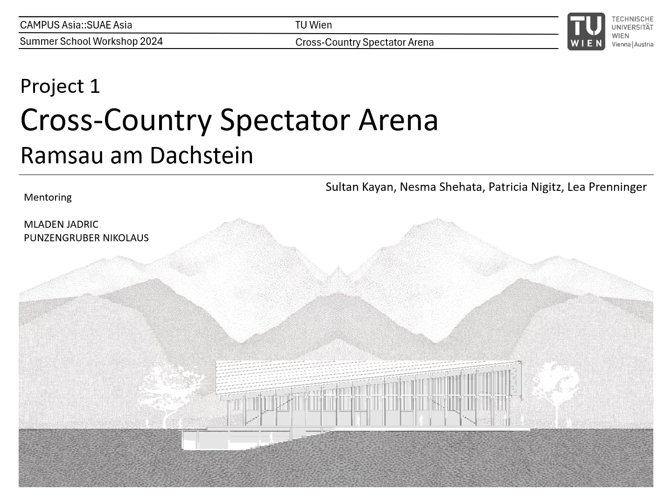The arena is located in the center of Ramsau, right next to the local swimming pool and the ski jumping facility. Our arena concept is based on the structure and principles of the Palazzo della Ragione in Padua. This medieval palace of justice building was established in the 13th century and once served not only as a town hall but also as a market hall. It was and still is a multi-purpose building.

This idea is translated into a multifunctional arena, serving as a cross-country arena in winter and event location in summer, a place where people get to meet, work and communicate. Similar to the Palazzo della Ragione, our arena building is surrounded by an arcade. It serves as a buffer zone, creating a transitional area between the weather-exposed outside and the dry and warm inside.

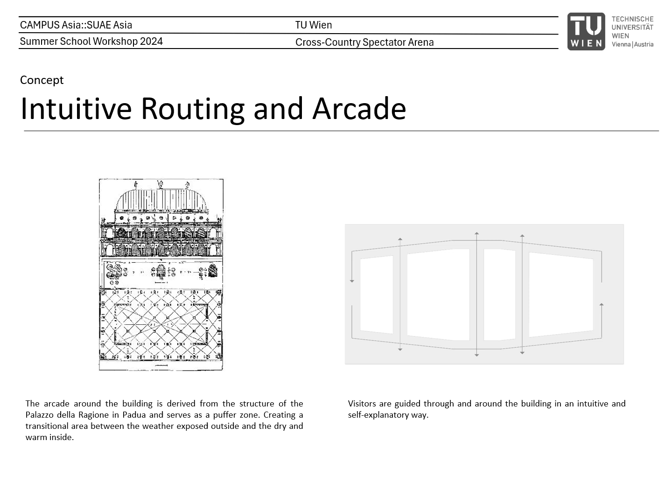Visitors are guided through and around the building in an intuitive and self-explanatory way. By moving through the building, the sense of intimacy increases from the exterior to the interior of the arena building. On the outside, the building presents a more formal and neutral facade.

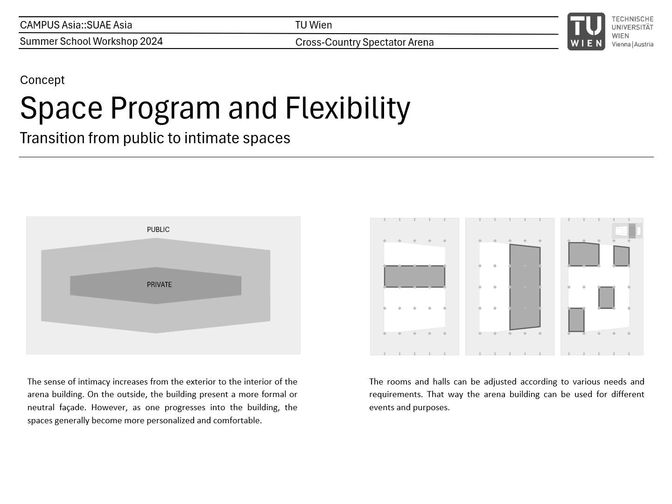However, as one progresses into the building, the spaces generally become more personalized and more comfortable. Our building is based on a grid which defines our construction. However, the rooms can be divided and used in a flexible manner. That way, it is made sure that the local community can still shape the arena according to their own needs.

The grid starts in the parking deck and reaches up to the second floor. The ground floor shows the surrounding arcade and the special two-story multipurpose hall in the northern end of the building. This hall can be used for various events. The first floor consists of all the necessary organizational rooms.

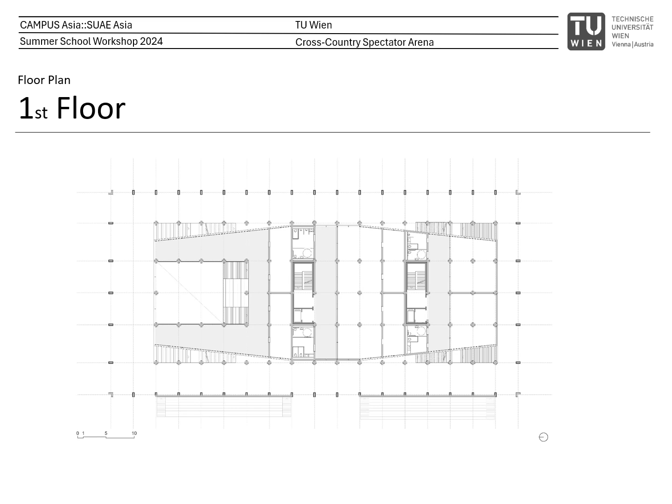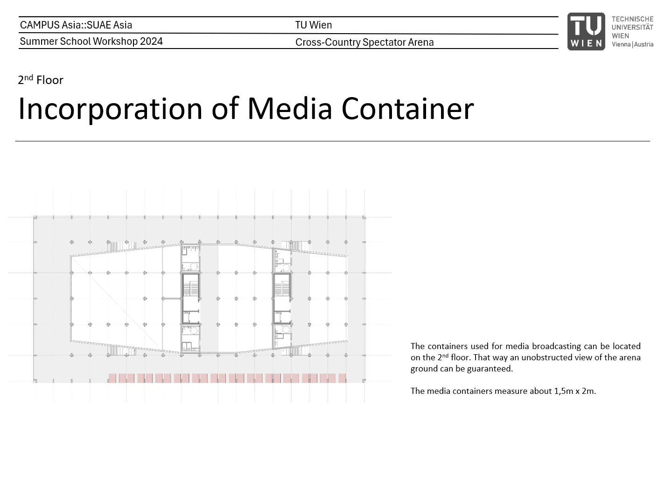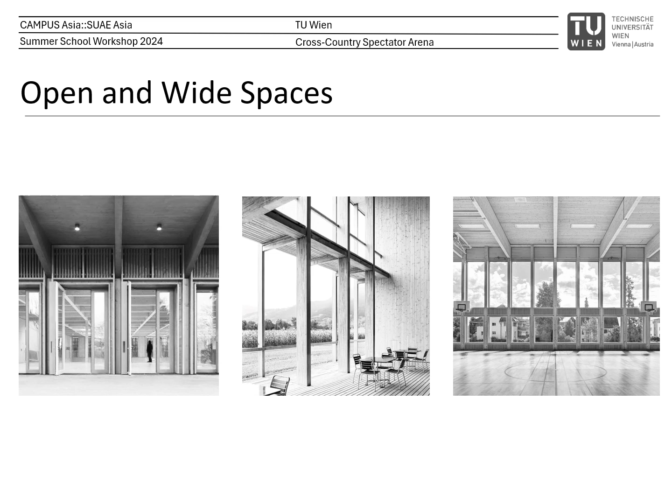The building connects with the community of Ramsau am Dachstein, not only in the way it is used, but also in the way it is shaped. Its visual appearance is inspired by the local vernacular architecture. The arena rests on a solid concrete pedestal, elevating the ground floor from the street level.

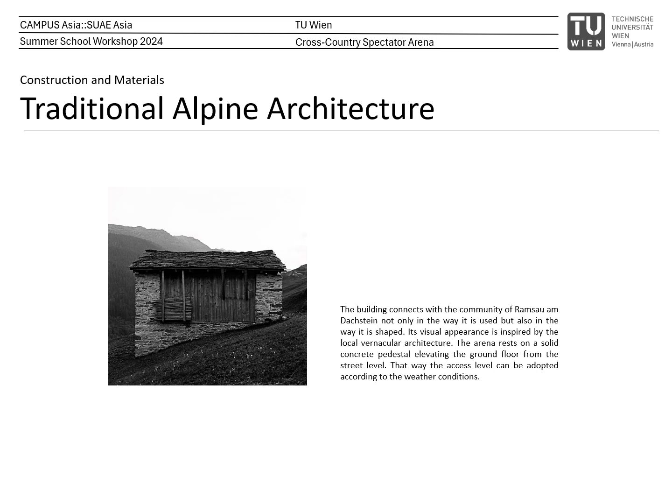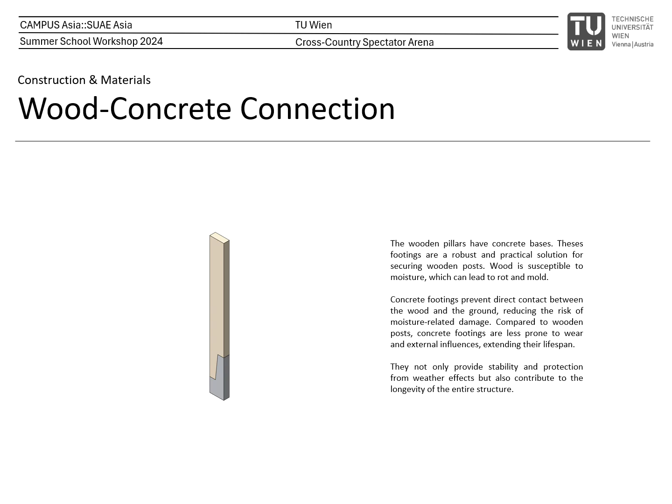Furthermore, the wooden pillars are supported by concrete bases. The wood connections are easy to construct and reconstruct.

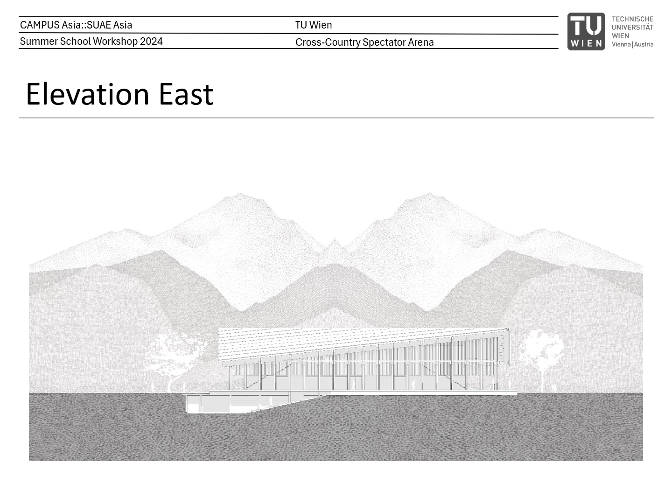The facade is minimalist and reduced in ornamentation. That way, it doesn't interrupt the surrounding environment. More so, it fits into the mountain shapes and neighboring gable roofs, without trying aggressively, almost in a reserved way. Construction becomes ornamentation, and the scale of the beams and posts is chosen precisely and adjusted to the building dimension.

The doubled beams create a certain lightness. That way, the rather large dimensions of the arena become less evident and more fitting to the surrounding.

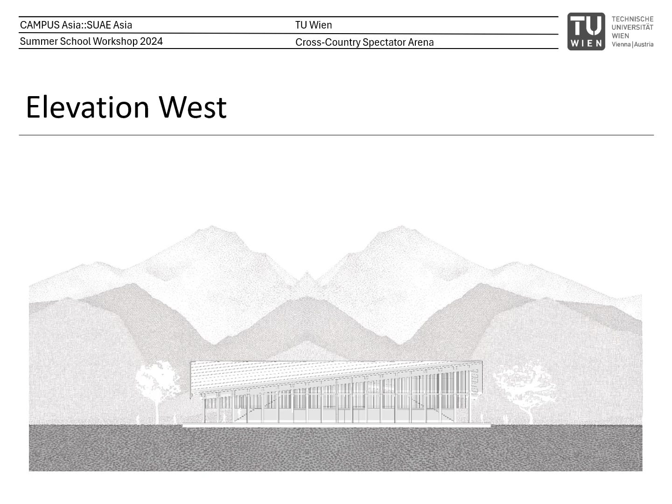As time passes, the arena will be a place to host different events. There will be a transition in the way the building is used, but also in the way the materials will age and develop in their own patina, and with it, their own story. We want to end our presentation with a short video of our project, followed by a quote of Frank Lloyd Wright.

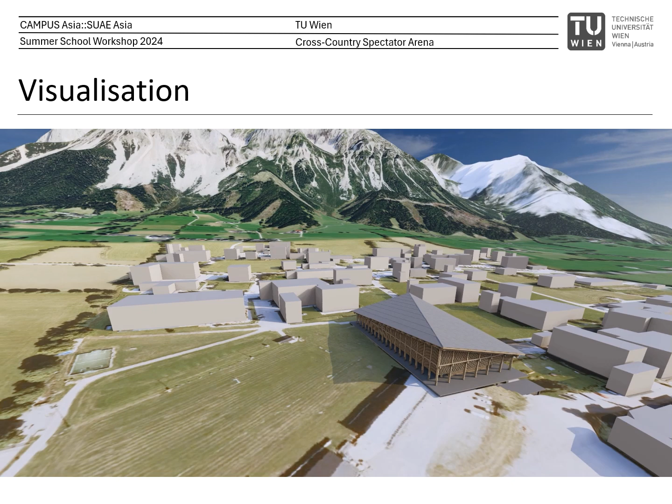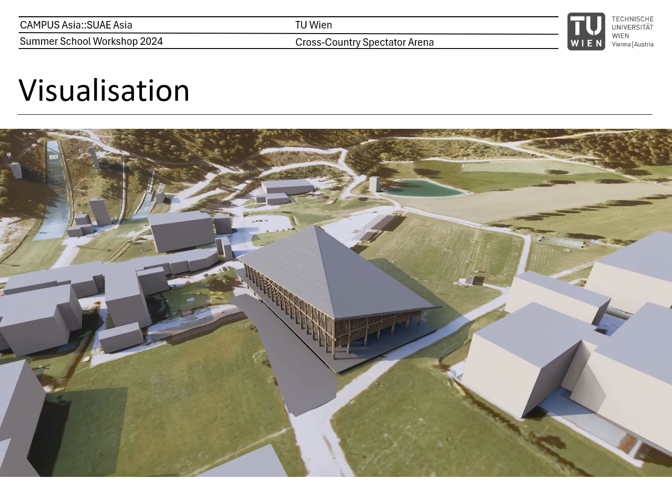Beautiful buildings are more than scientific. They are true organisms, spiritually conceived, works of art using the best technology by inspiration, rather than the idiosyncrasies of mere taste or any averaging by the committee mind.